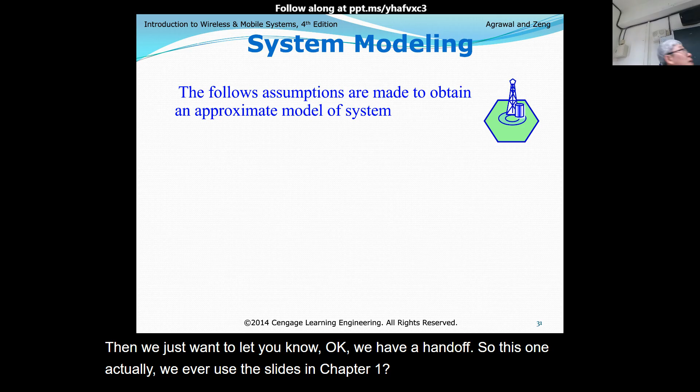So here, same, we just want to let you know, oh, okay, we have a handoff. This one actually, we used the slides in chapter 1. So here, later we want to have the modeling. Maybe for you, you think it's advanced modeling. Why do we want to have modeling? Actually, we still care about resource allocation.

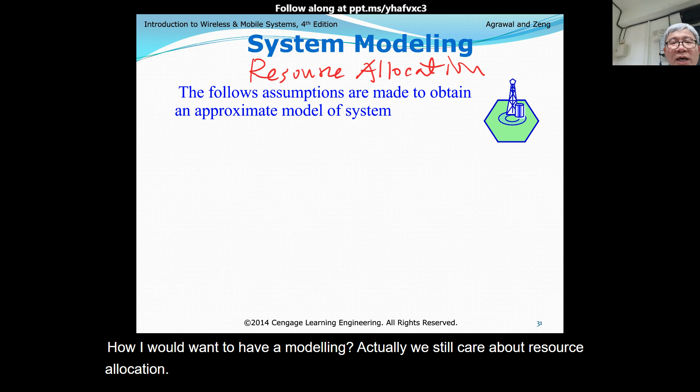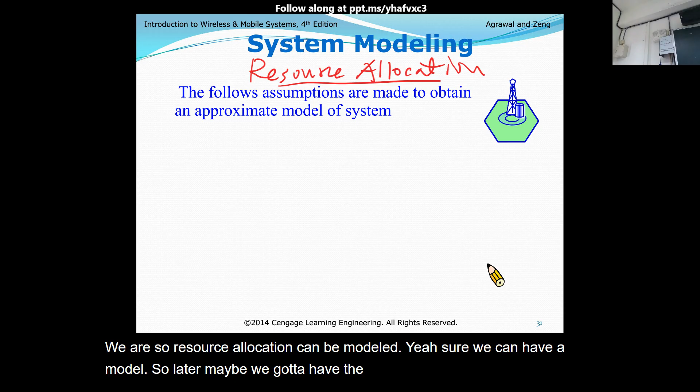Well, resource allocation can be modeled. Yeah, sure, we can have a model. So later, maybe we'll have the details about system modeling, and the details of system modeling to have the schedule model for resource allocation. And also, we consider handoff for sure.

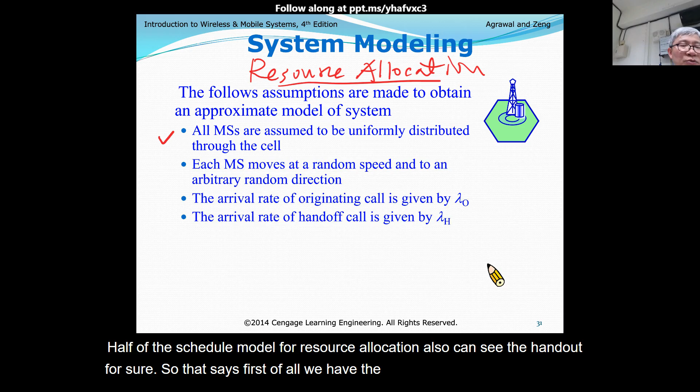So first of all, we have the following assumptions. The first one, all mobile stations are assumed to be uniformly distributed through the cell. So, okay, we have the random position for the mobile station. But this one is just an assumption, so we don't use it directly. We mention, okay, random position for the mobile station.

And with the random position, then we have the random speed and the random direction. So we try to have the initial position and the initial speed to move. Even with an initial speed, we may alter the speed later. Normally, we should have something like that. For example, when you ride a bike, do you have a constant speed? Normally, no.

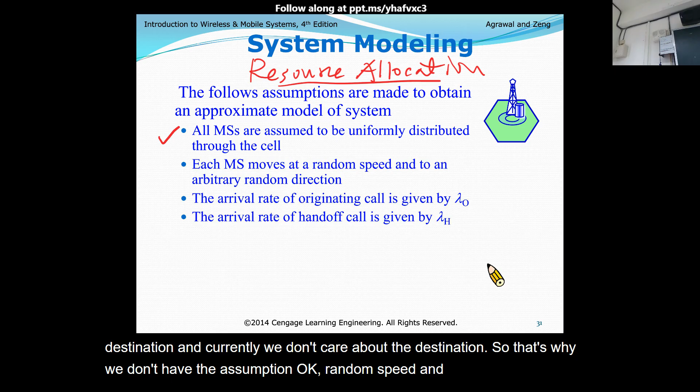Maybe you want to ride a bike towards a specific destination. So you will have different directions, but finally, you may reach some destination. And currently, we don't care about the destination, so that's why we have the assumption of random speed and random direction. Of course, we have the random position. So up to now, two assumptions to cover the two ideas.

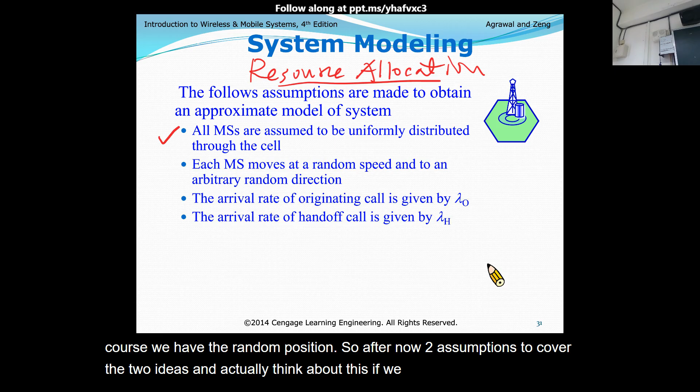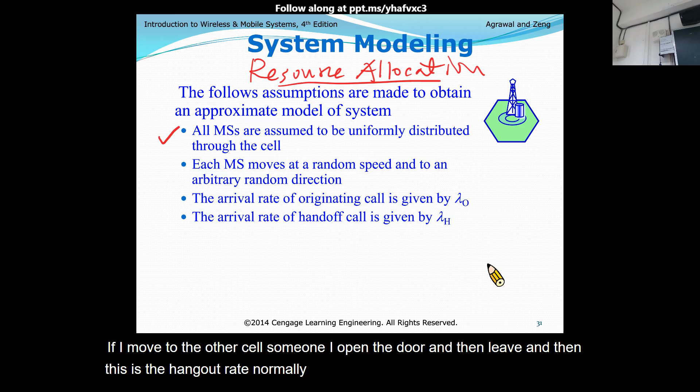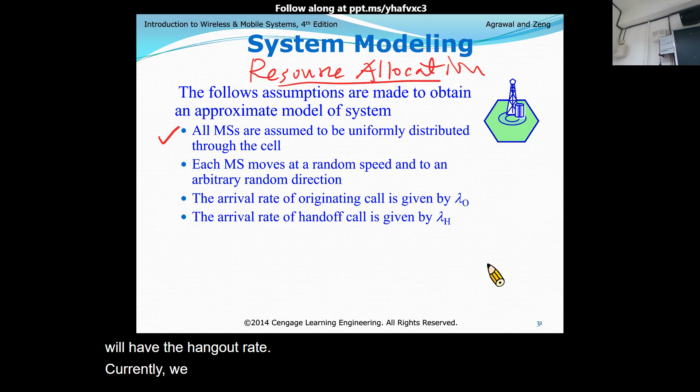And actually, think about this: if we have an area here, how to determine the handoff call rate? In fact, if I move to the other cell, it's like I open the door and then leave. And this is the handoff rate. Normally, some mobile stations with some specific direction move towards that direction, so we will have the handoff rate. But currently, we don't follow that idea to have the exact modeling. So we have a simple assumption.

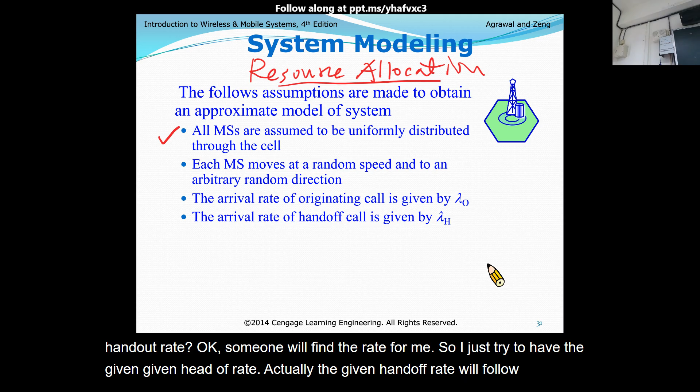Okay, so arrival rate of originating calls, sure, we can follow the current rate. However, how about the handoff rate? Okay, someone will find the rate for me. So I just try to have the given handoff rate. Actually, the given handoff rate will follow the assumption of originating call rate and the assumption about this, so that handoff rate can be related to the originating call rate.

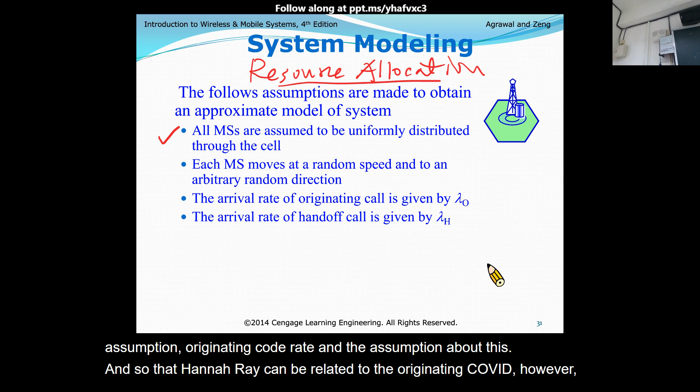However, right now, we think someone will derive it, so we can decouple the current rate. So it seems we have individual rates, one for originating calls and one for handoff calls, and we can treat them as irrelevant. In fact, no, they are relevant. But how to relate handoff rate to originating call rate? We may have the detailed model so that we can find indeed the relationship between originating call rate and handoff rate.

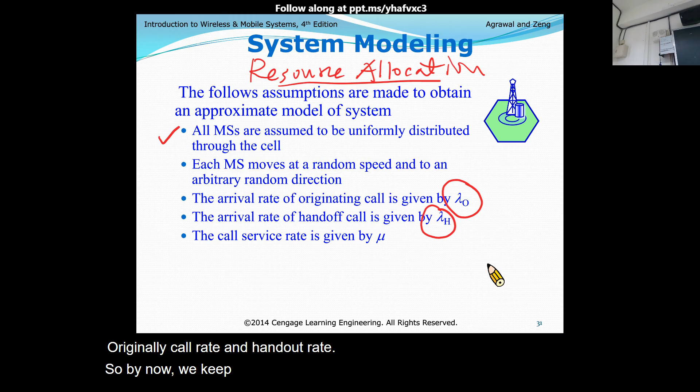So right now, we keep it simple. Something like given; at least someone can find it. Even if someone cannot find it, from the viewpoint of performance investigation, we can think, for example, given value 1, value 2, value 4, value 5. So we can have different values given, and we can have the corresponding performance shown by different handoff rates.

And so we know, okay, how about given value 1, 2, 3. If we have different values, then we will reach different performance. So we can use that way. Right now, we just follow this way, and we think we can have the given handoff rate here. And of course, for the calls, we are homogeneous.

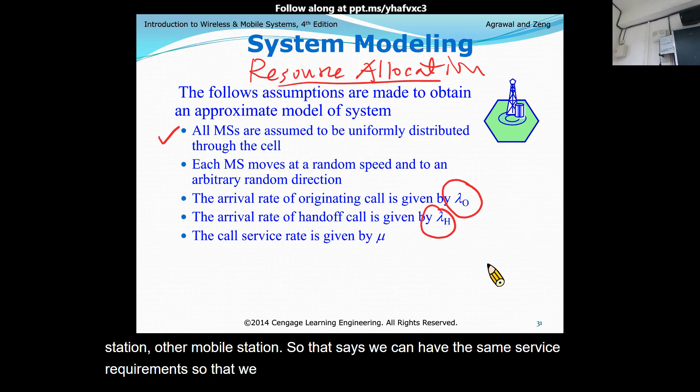Homogeneous means we can have the common requirement by the mobile stations, so we can have the same service requirement. So we assume the call rate follows the same rate. It's mu. So if we want to measure the call duration, we can have the common mean. Common mean, then we can have the common rate. All right, so mean and rate.

Mean duration and the rate actually have a relationship. Mean service time is the reciprocal of the mean rate, so we have a fixed relationship. That's why we have the common mean service time. Because of a common mean service time, we have the common service rate here, given by mu.

With the S channels, we want to consider the performance for originating calls and handoff calls, put together. So we want to measure the corresponding performance. This is the simple one: even for originating and handoff, we have the common service rate.

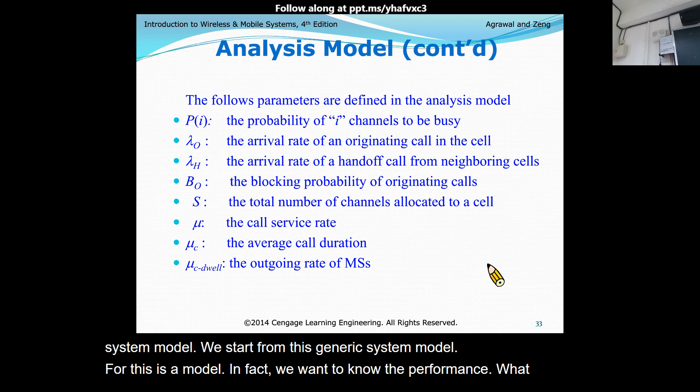For that system model, we want to know the performance. What kind of performance can we have? Right now we have the probability of i channels being busy; later we can show the diagram. And currently we have rate. But the first one, we have a blocking probability. So currently the measure should be blocking probability. So what is blocking probability?

Blocking probability says if I request service but no channel can be allocated to the mobile station, then that mobile station will be blocked. For example, station 1 tries, station 2, station 3 and 4, up to station 10. After trying, 3 mobile stations got blocked. Then the blocking probability should be 3/10. So this is a blocking probability.

And right now we care about originating calls. Using the similar way, originating calls 1, 2, 3 to 10 each try to check the resources. Will the call be blocked? If yes, we make a mark. Maybe 3 calls are blocked, then 3/10, and we have the blocking probability. So currently we care about this blocking probability of originating calls.

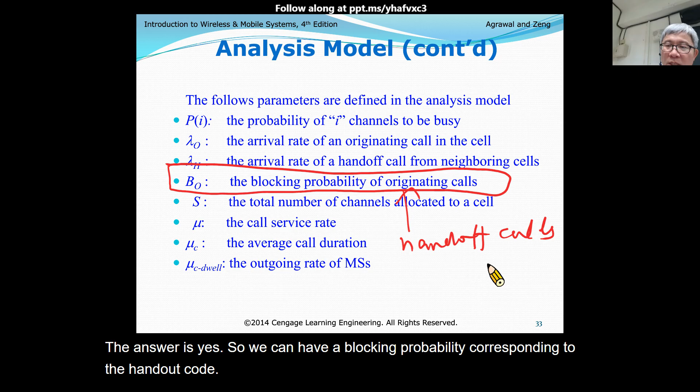Is it possible to have a similar blocking probability for handoff calls? The answer is yes. For handoff calls we have a specific name: forced termination probability. This name lets you feel that we have an ongoing call, but the call is forced to be terminated. So we have forced termination probability associated with the handoff call.

But right now we don't mention that one. Still, we will care about that kind of probability; you can call it the blocking probability of the handoff call, or the forced termination probability, because it's an ongoing call that is forced to be terminated.

And here we have different notation: call duration. Call duration and the current cell provide the service rate; within the cell, the duration is governed by this. But we may initiate the call from cell 1 and end at cell 10, so call duration is the whole duration. The service rate focuses on that cell, the duration within cell 1, cell 2, cell 3, and others. So they are not the same.